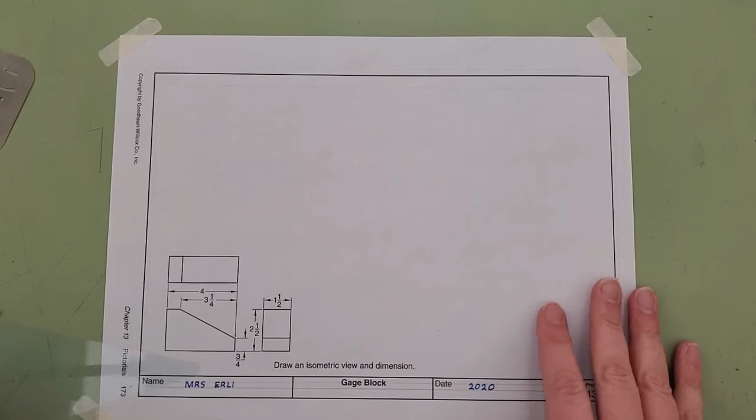On 13-4, this one's going to seem suspiciously easy to you, especially after that step block that we just completed on the other side of the handout. Okay, the same issue that we had with the step block, however, is what we have over here, in that we don't have a starting point picked out for us already.

So always remember, start with your glass box, your total height, total width, total depth, and use a 5H pencil. Draw very, very light. I see an eraser booger here. I'm going to get that cleaned off. And we're going to start off really low, close to our title block. Okay. Now the longest part of this is off to the left. That's why I've adjusted everything to the right.

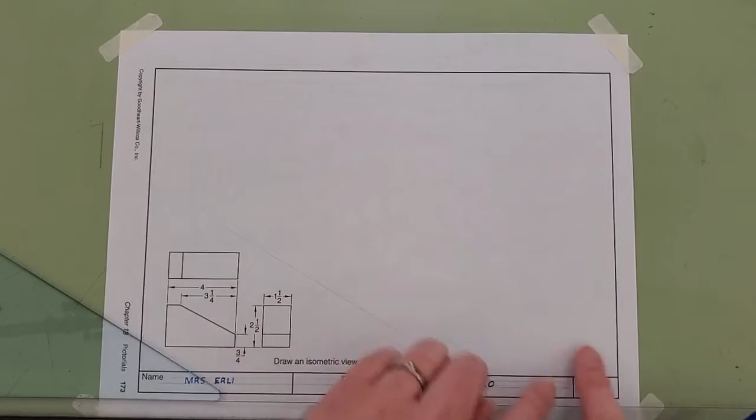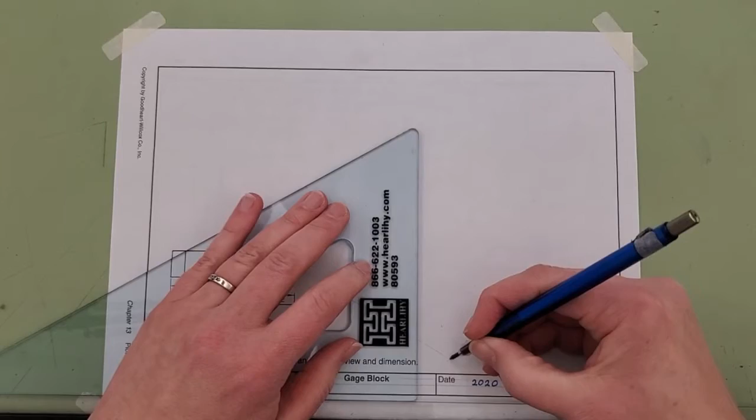And bring that to the right and complete it by putting your pencil in the intersection and drawing a vertical line. Now we're going to do our measurements. From the front to the back of the block is 1 1/2 inch. So I'm going to make a little dot and project that up.

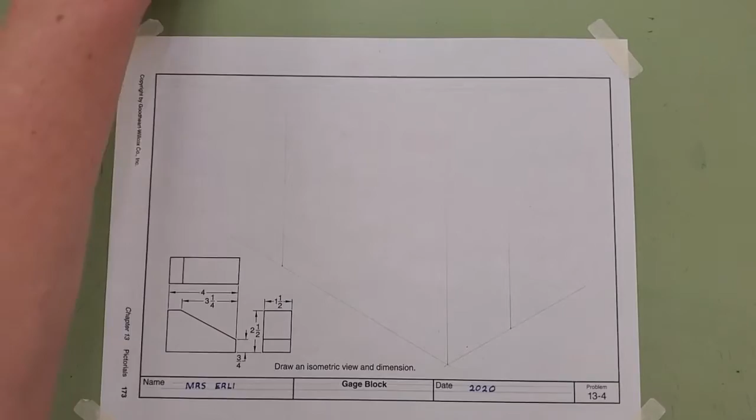Okay. From the right side to the left side is 4 inches. So I'm going to line this up. Make a dot. Extend. And then finally the total height is 2 1/2 inch. So I'm going to measure two and a half.

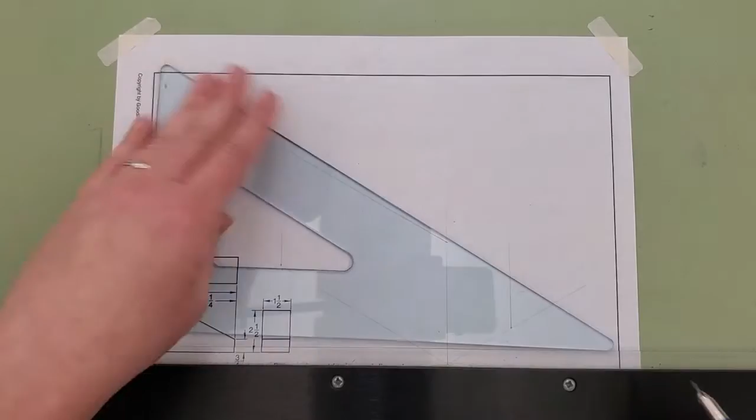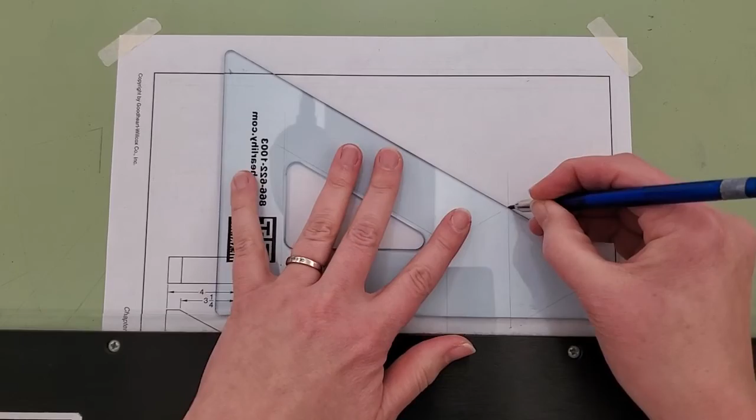Now keep in mind, I have my 45-degree triangle out, but I have it off to the side because I don't really need it for isometric drawings. That's your best friend during orthographics, but in isometrics, the 30, 60, 90 triangle is the one that you will use the most. Okay, now I have the tops of these, so I need to finish creating my glass box by using those intersecting points. And this is my glass box. I definitely have plenty of space from any of the border lines, so I can continue on.

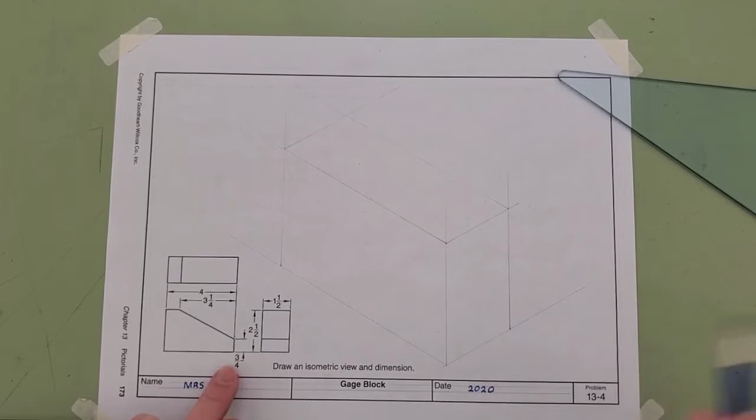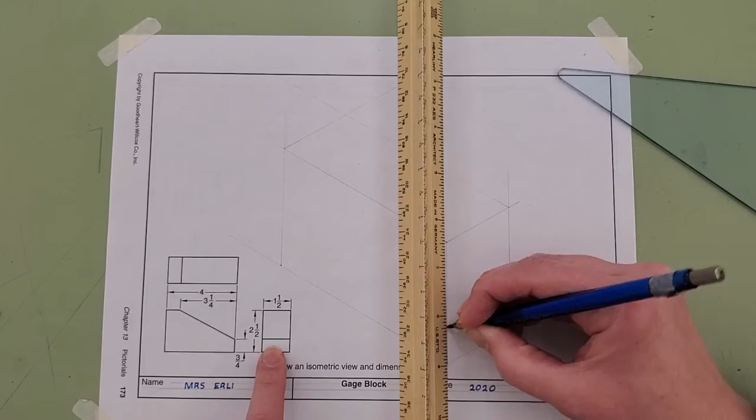So, looking at the orthographic images, the front view shows that all the way to the right we have this slope, and it starts 3/4 of an inch up from the very base. So I'm going to measure 3/4 of an inch. Okay, and from the side view, it's going to create a long line over there. So I'm just going to go ahead and darken that in, or actually I'll just extend it over for the moment. Okay.

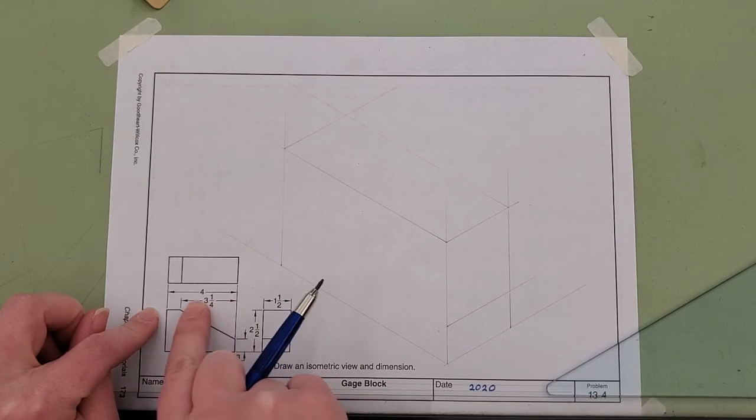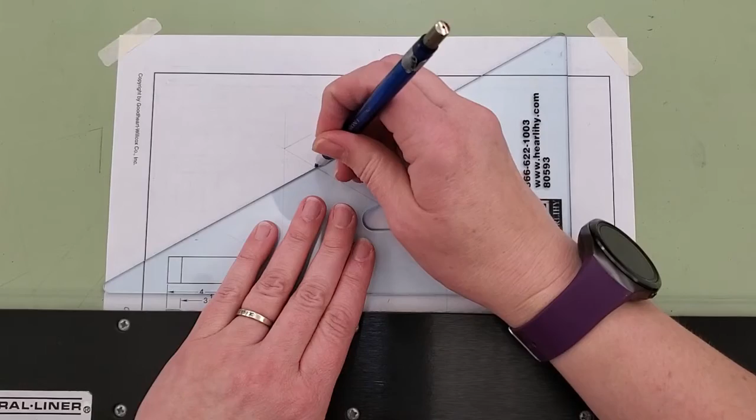The slope starts not from the very end, but it comes from the right side over 3 1/4 inch. So just keeping life easy on me, that's 3/4 inch from the left side. Make a dot. Extend that over. Okay.

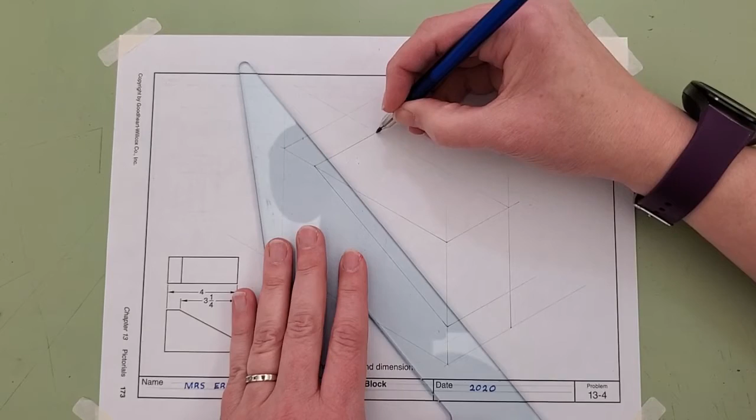And then finally, no, it doesn't give me an angle to use for here to here. All you have to do is connect those two intersections. Okay, there's one side. And there's the other. And then go in and darken in your object lines and you have created your gage block. So I'm going to just quietly finish mine up.

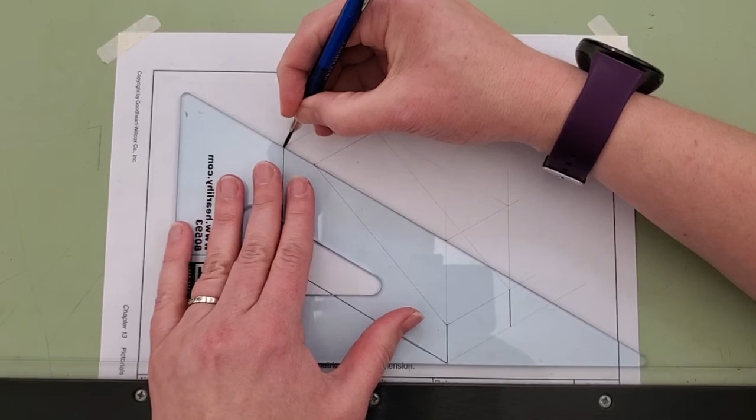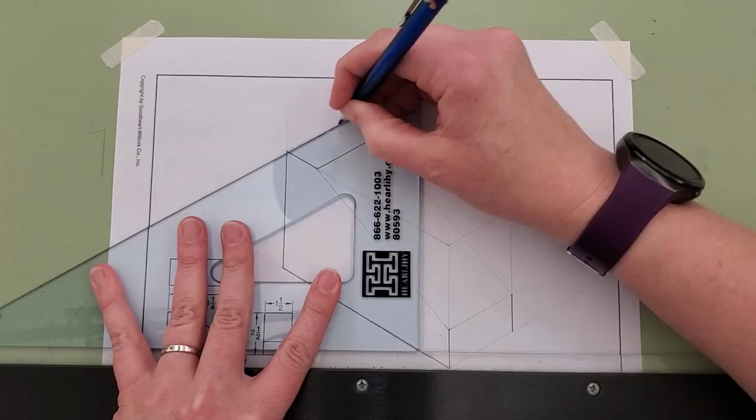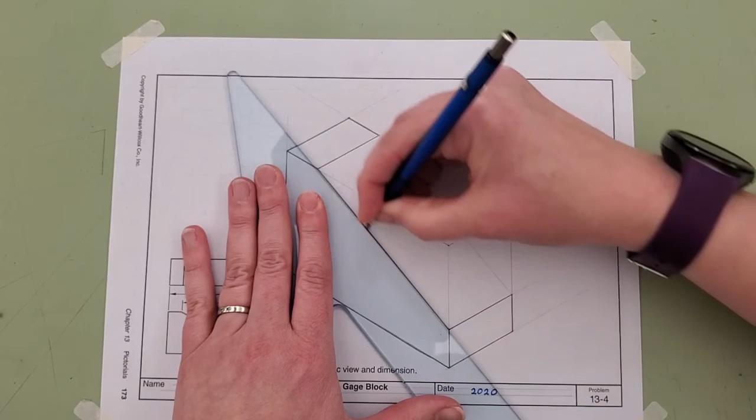And just keep in mind, if you take the time to find your starting and stopping point to begin with, you won't have to spend as much time cleaning up your endpoints at the end. But make sure you do clean them up in case you have an overlapping line or an ugly intersection. Okay. And there is your gage block.